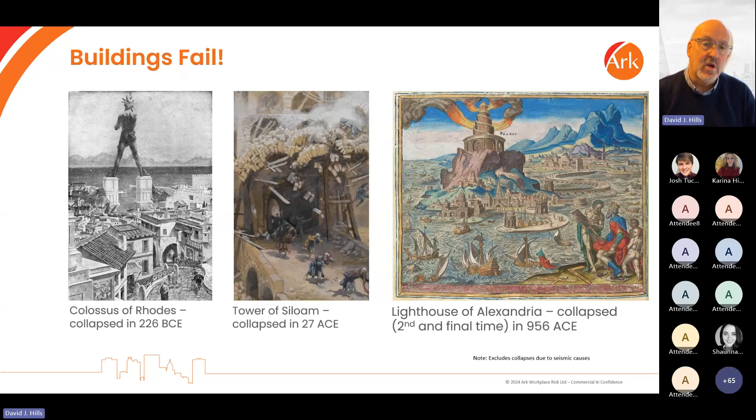So we have to recognize that buildings fail. I can go back many years to the Colossus of Rhodes back in 226 BCE, all the way to the failure of the lighthouse in Alexandria in 956. But really what we want to focus on is notable residential structural failures. So what I've done here is put together a very quick list of those types of buildings that have failed over time where a number of people have died.

So we've actually had structural failures. These particular ones exclude all types of collapses due to seismic activity—we're not talking here about failures in respect of earthquakes, for example. But we could go back to 1968 and Ronan Point in London, where we had 4 dead and 17 injured, and we can move our way all the way through to Champlain Towers in 2021, where we had over 98 dead.

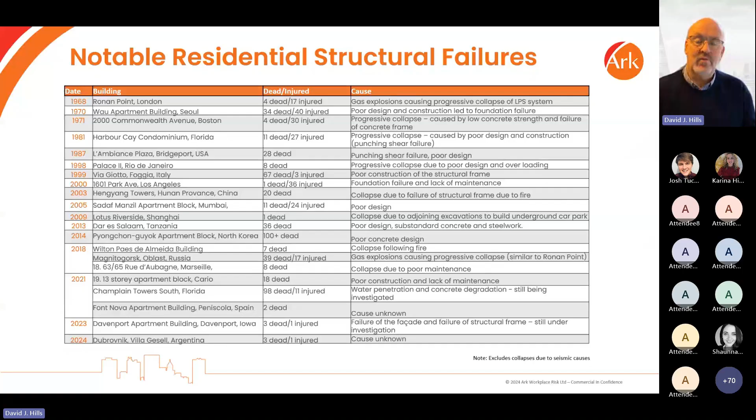And then just a few months ago in Dubrovnik, Argentina, we had another failure there. So we've had a significant number of residential failures across the globe, but I want to focus on these two to start with, and that is Ronan Point.

Ronan Point was a pivotal situation in the UK. It was constructed post-war, a large panel system, effectively large panels pinned together to form the building. We had a gas explosion on the 18th floor. It blew out one of the load-bearing walls, and that meant each of the floors above, all that were supporting the flats, stacked onto the floors below, causing a progressive collapse.

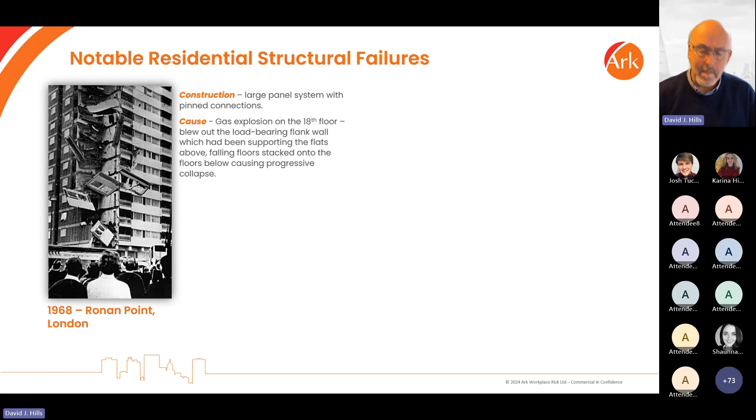Out of that, we had changes to the building regulations put in place in 1970, which lasted right through to a couple of years ago. So we've got a lot of buildings in the UK considered in respect of disproportionate or progressive collapse, however you want to call it. But also there are a number of buildings, the older ones especially, that have particular concerns we need to at least consider. Then, of course, a couple of years ago, 2021, Champlain Towers.

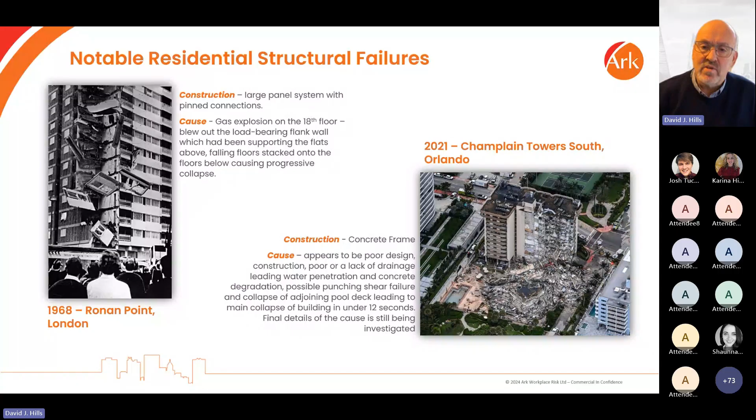I'm going to take you through Champlain Towers in more detail with some footage and an analysis of why it went wrong. We've got a concrete frame building, poor design, poor construction, a lack of drainage, and we had half of that building collapse within 12 seconds. The final cause is still being investigated, but there are some very clear and obvious issues. So one thing I'd say straight away is that this is not down to a single issue.

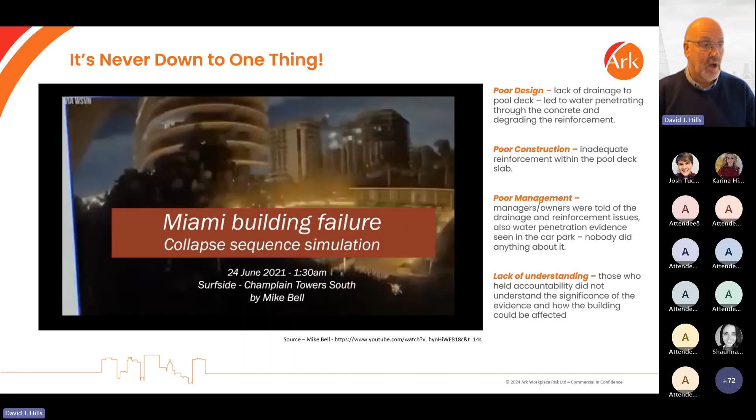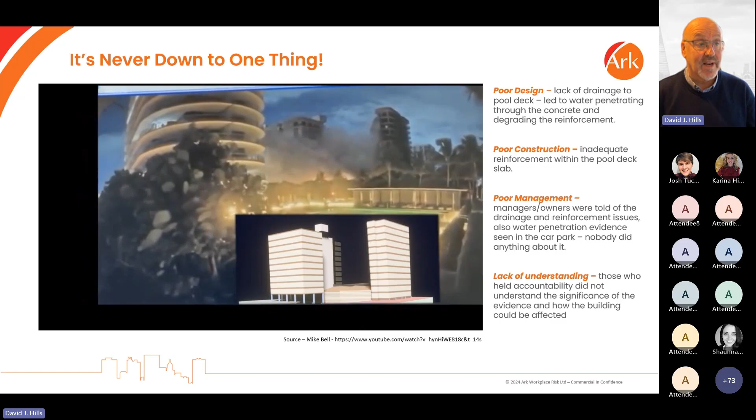The simulation I want to show you comes from a gentleman called Mike Bell. You're seeing CCTV footage from an adjoining building of the collapse, and as I say, that collapse takes 12 seconds.

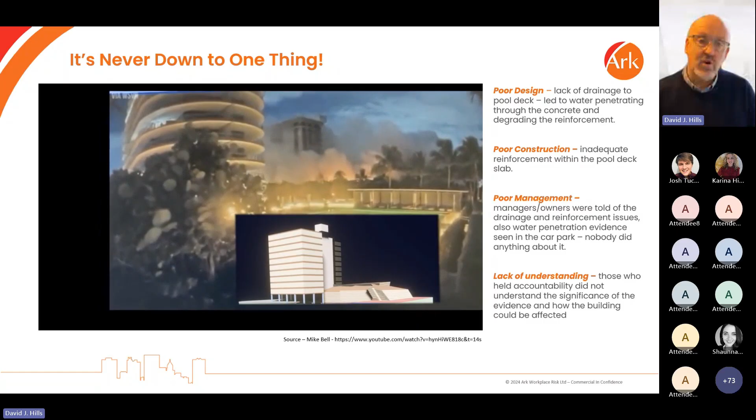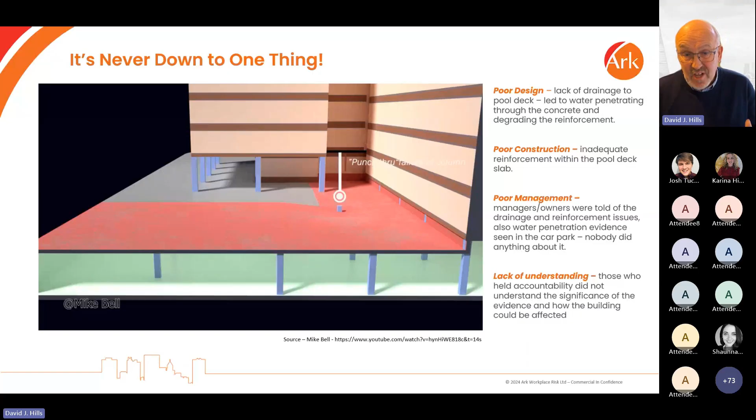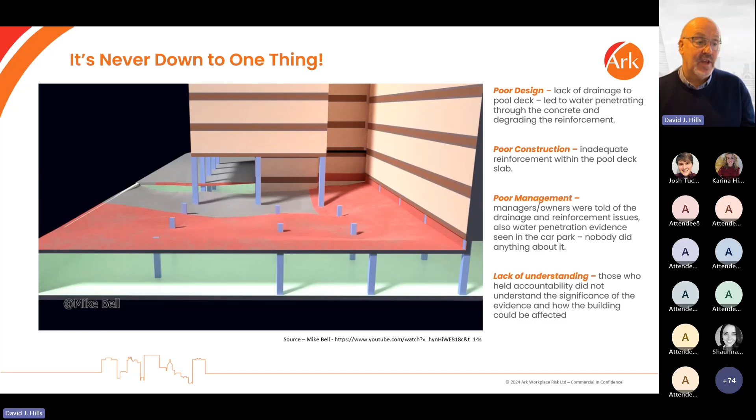What you'll see through his simulation is that we've got very poor design. We've got a pool deck adjoining the building, underneath which you have a car park, and that pool deck didn't have any particular drainage. So water went through the pool deck and started to corrode some of the reinforcement. The reinforcement was poorly placed, and we started to see what's called punch-through shearing, where the column heads were punching through during this failure.

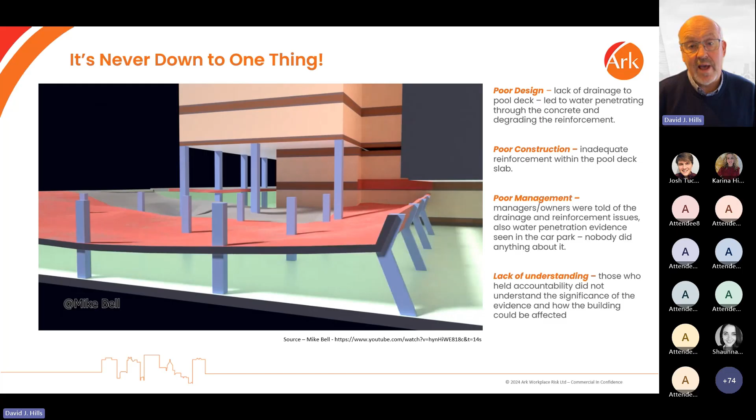We had a bit of a catenary action here where we were pulling columns out, and then we actually had the structural collapse of parts of the building.

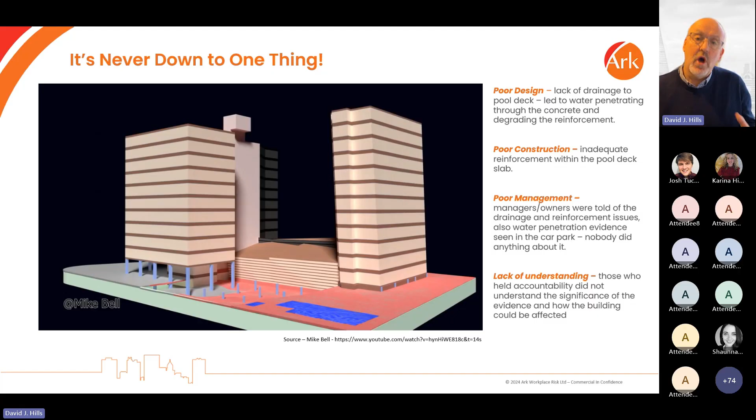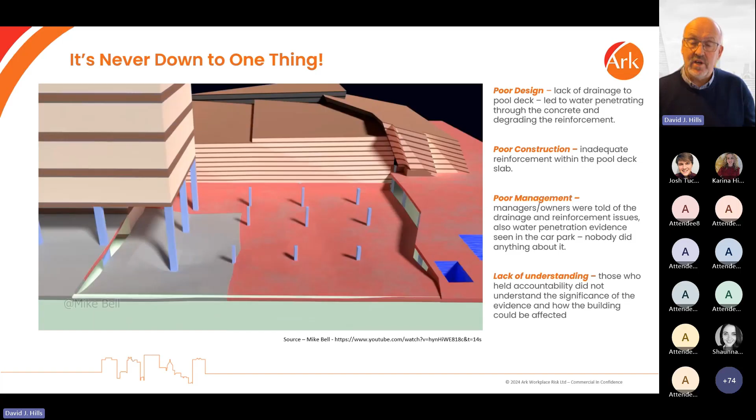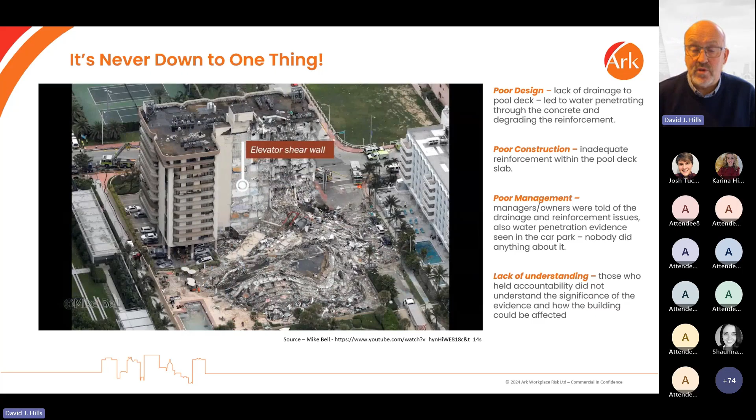Now, all of those issues were known about. The management company and the owners of that building had undertaken to review particular concerns, especially within the car park. They were told there were drainage problems. They were told about concerns over reinforcing issues and water penetration getting into the car park itself, but nobody did anything about it, mainly because they didn't actually understand how important those concerns were.

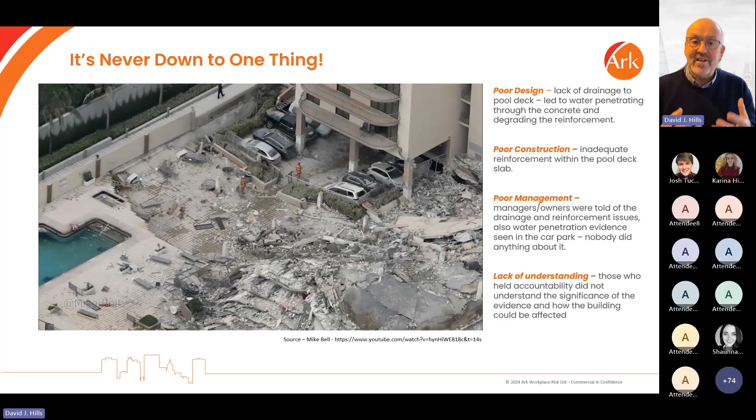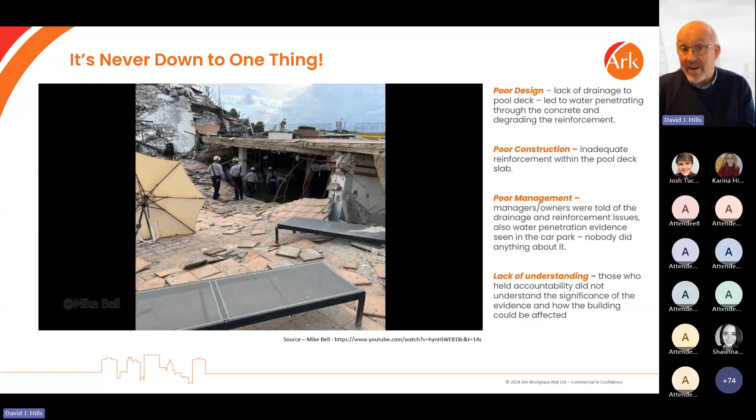So that is what I really wanted to show you quickly about how things can happen. It's not normally just down to one thing. Here we've got poor design, poor construction, poor management, and a complete lack of understanding of why and how things actually fail. So let's move on then.

So we know that buildings fail, and they often fail for numerous reasons. But the Building Safety Act now requires us to start considering the assessment of structural stability as part of building safety risks. Section 83 of the Act basically states very clearly those who have accountability for a higher-risk building or part of that building. So you may not have total control over all of that particular building. They must assess the building safety risks as regards the parts of the building for which they are responsible.

And I'm going to go back to the definition of building safety risks in a few seconds. But it's very important that section then goes on to say that further such assessments must be made at regular intervals. It does not state the type of regularity, but it does state they should be reviewed at a time the accountable person believes there is reason to suspect the current assessment is no longer valid.

And on the third basis, you must undertake such assessments at the direction of the regulator, and the regulator will then set and determine the period and frequency of that particular assessment.

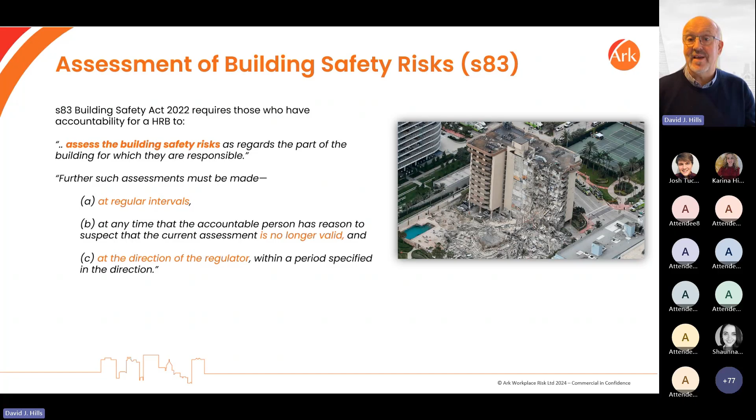We've got to undertake these types of assessments, and we can't just believe that assessment is going to be suitable and sufficient forevermore. We have to look at undertaking those types of assessments on a regular basis.

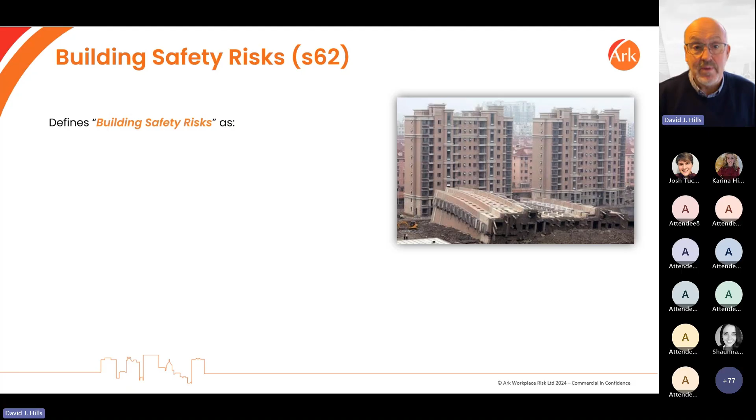Now, I want to quickly jump back to building safety risks, so we can square that particular circle. We have to assess all of those building safety risks, defined as the risk to the safety of people in or about a building arising from any of the following: the spread of fire, which most people understand and have undertaken fire risk assessments for because of other legislation.

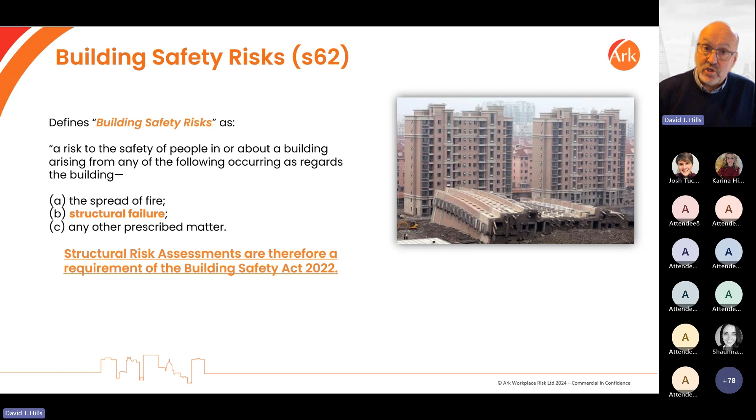The Regulatory Reform Fire Safety Order in England, Fire Safety Scotland regulations in Scotland, for example. But it also says we've got to consider structural failure and any other prescribed matter. So it's very clear then: the law requires structural risk assessments for a higher risk building as a very clear requirement of the Building Safety Act.

What I would say, though, is that the definition of building safety risks is fluid. It can change at any time. The government has given themselves the opportunity to make those changes using statutory instruments, and so they can do that on a relatively quick basis.

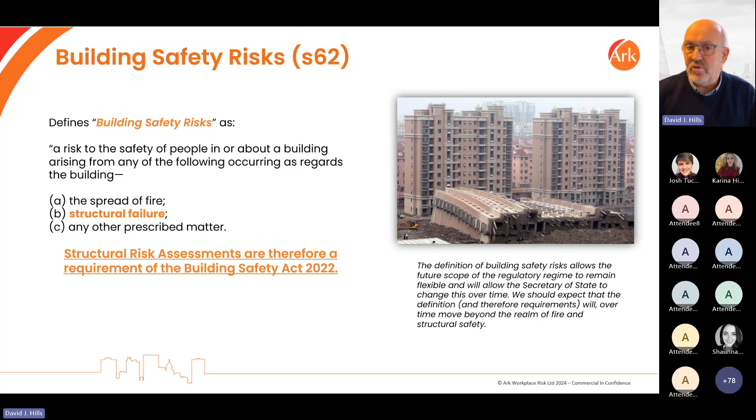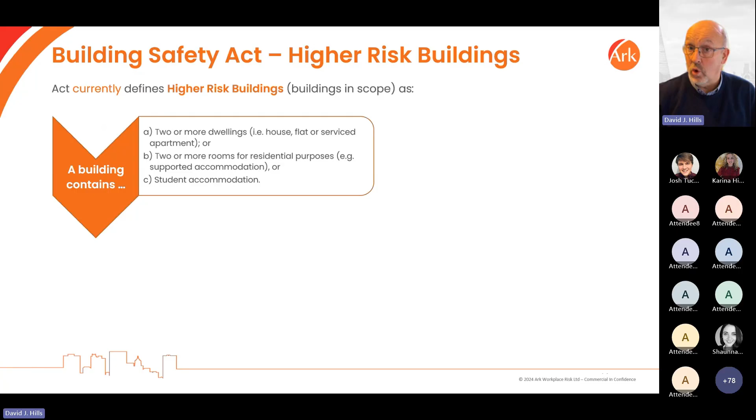One question we often get asked is, do we need to do this for all types of buildings? The only types of buildings that present a legal requirement for you to undertake a structural risk assessment are buildings that contain two or more dwellings, or two or more rooms for residential purposes, or buildings that contain student accommodation, and that satisfy the current height conditions - basically 18 meters above ground level, and/or 7 stories.

Now that could change over time. The recommendation within the Grenfell Tower inquiry report suggests that may have to change, but we are where we are at the moment. That is the requirement currently, although it's an arbitrary figure, and the inquiry is looking for us to move to a different area.

There is a possibility the scope could change again through parliamentary process, allowing the Secretary of State to make those changes on a relatively quick basis. So we understand that by April next year, we will have an understanding of where the government intends to take the next stage of building safety following the Part 2 section of the Grenfell Tower inquiry.

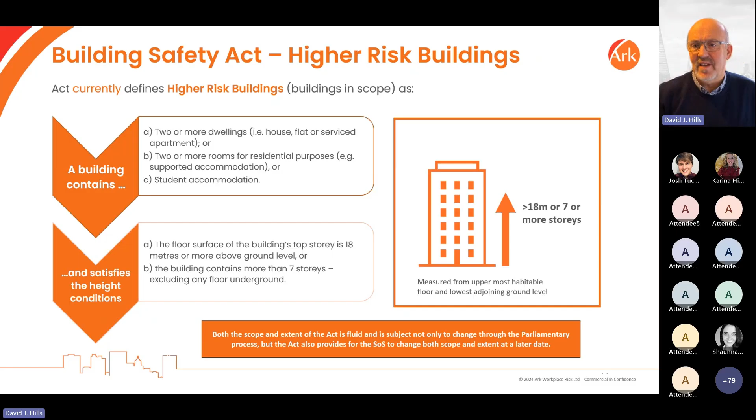So there's a need for structural risk assessments in higher-risk buildings. Those higher-risk buildings are well known. So how do we go about undertaking structural risk assessments? It's a question we get asked often.

The one thing we always refer back to is the Institution of Structural Engineers guidance. They have produced a very good guide called Assessing Higher Risk Buildings under the Building Safety Act, a compendium of structural typologies. This document is really good, but it is a guide. There is a legal requirement for the structural risk assessment, but at the moment this is the best way of undertaking that particular approach.

Now, the guide itself makes it very clear that there are certain limitations. It says, for example, due to the open-ended nature of structural assessments for building safety cases, a degree of prioritization is required, and they base much of this on risk and on the type of building. They also make it very clear that it will not be possible to assess every structural element through an assessment process, nor would it be appropriate to do so.

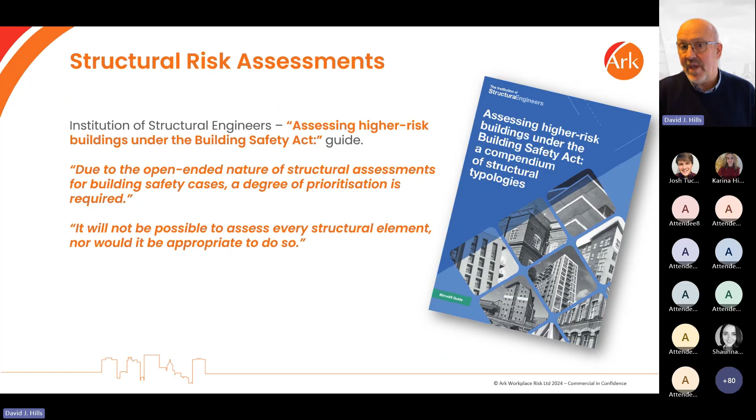And the guide also makes it very clear that the inspection recommended within their particular four-step process is not undertaken on an intrusive basis. I want to put a caveat on that later - I've got another slide in a few moments' time to talk about that particular part.

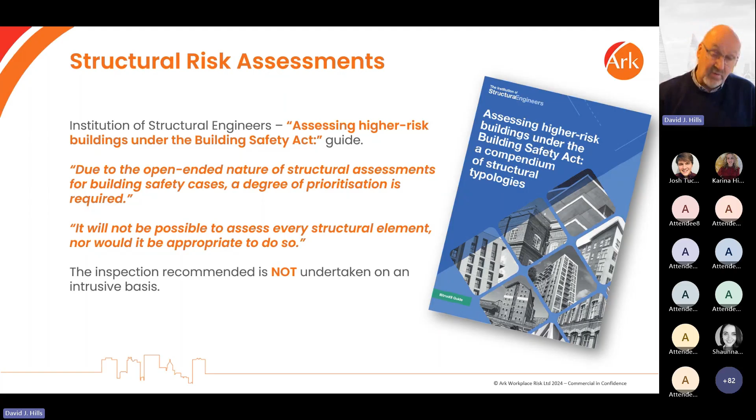But the whole sole aim of this is to undertake an assessment of the building based on four very clear steps, set out by the Institution of Structural Engineers. It talks about a desktop study and collation of information, continuing to review that information, a visual survey and inspection of the building, and then the actual assessment itself.

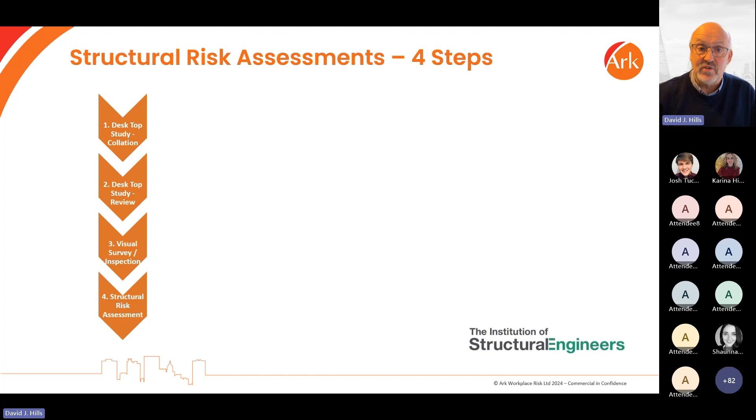So we are collating that building information, which comes from various different sources such as building archives. You might be lucky enough to get information from building control, but it's not always possible. You may understand or know what type of building you've got, so you've got industry publications, and also the website CROSS UK, which is a really good, helpful, safety-based database of concerns and issues raised by various parties for different types of building.

We've then got to identify the potential weaknesses. These are the common weaknesses that the Institution has recommended they consider, as well as very construction-specific ones. We can look through the guidance, and that will tell us what we should be looking for in certain types of building. CROSS UK is exceedingly good, as I said, and also we need to rely upon the engineer's own experience.

We then undertake that visual survey, assessing the potential building weaknesses, looking for modifications to the building, to the design. Modifications, for example, are drilling holes through concrete beams for use for services, retrofitting services. That's the type of modification we are obviously very concerned about.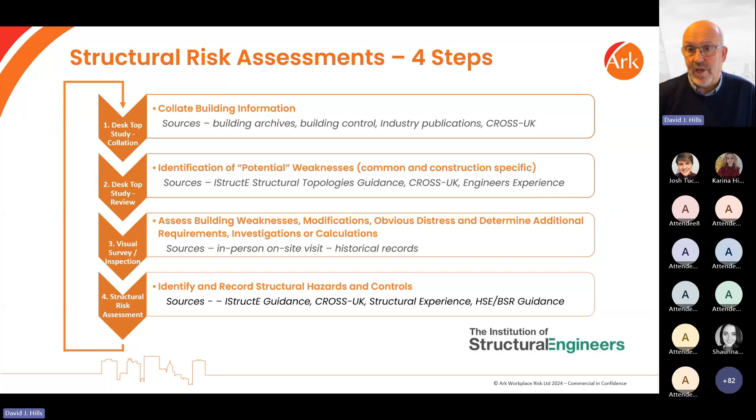Now, the Health and Safety Executive have produced some guidance, and they've been very clear. The regulator, who sits within the Health and Safety Executive, has advised that the level and extent, or the intrusive nature of any assessment, should be proportional to the risks.

And so therefore we have to start thinking about the actual building itself, the age of the building. The older the building, the more likely we've had changes to it, and the less likely we're going to have calculations. We need to start thinking about the design of that building and the construction techniques and methodologies that have been used.

Are we using, for example, large panel systems? Are we using deleterious materials like RAAC, for example, or wood wool? And then obviously we've got to start thinking of the occupancy as well.

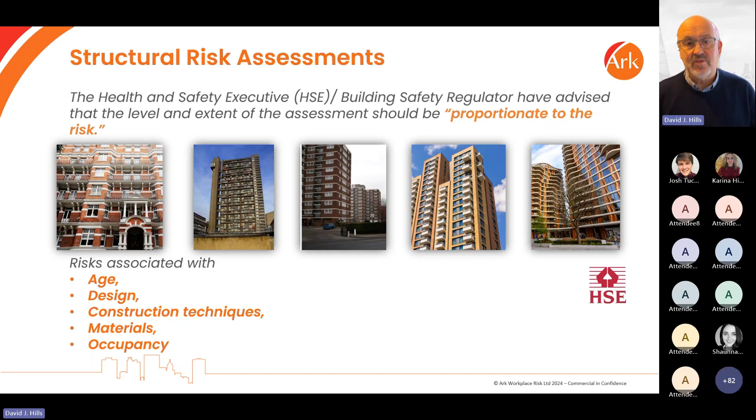It's not just going to be a case of buildings that were purpose built. We've got buildings that, for example, were office blocks that have been converted to residential blocks. So we have to start thinking about the level based upon those particular risks.

But the guidance makes it very clear that whilst we can acknowledge the Institution of Structural Engineers' approach means it's mostly going to be a visual or non-intrusive inspection, the Health and Safety Executive have made it very, very clear that there is going to be significant existing building information that is missing, and intrusive inspections may therefore be required. So we cannot rule out that additional and intrusive investigations are going to be the findings of your overall structural risk assessment.

So the guidance then, that's where we are with what structural risk assessments should be doing, and the legal requirements and the guidance sitting behind it.

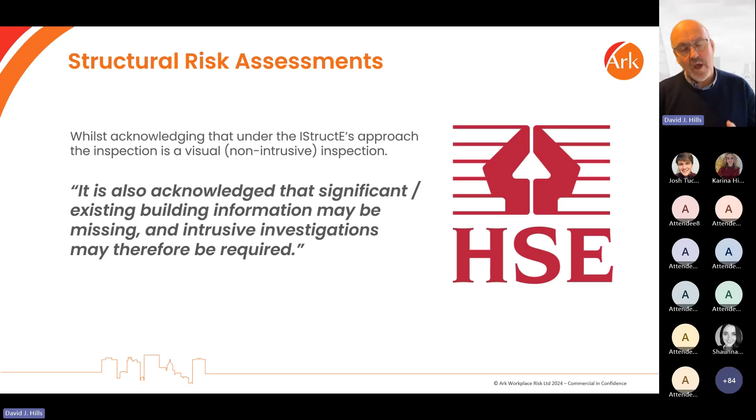But just to give you a little bit of information, when we are undertaking our structural risk assessments for our clients, we take a look firstly at the common issues, the types of issues that will be common to all types of building. I've no intentions of taking you through all of these—there are lots of them—but we have to start considering all of the elements here.

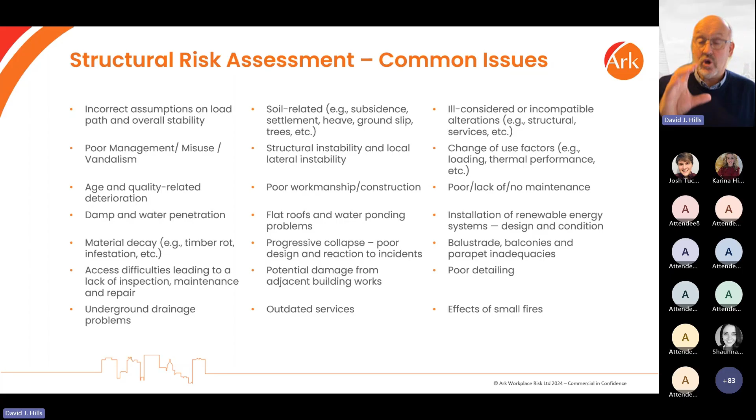One of the major issues that we're always concerned about is damp and water penetration, because of the types and nature of the construction materials that have been used. And obviously workmanship and construction defects are, again, very, very important. But once we've considered the common issues, we then start having to think about the construction-specific issues, so you're going to have, for example, load bearing masonry.

It's not a hugely used approach, especially for very tall buildings, but we're going to have to start thinking about the mortar arrangements. We're going to be talking about lintels, and we're going to be looking at roof spread and basically cracking within that particular type of structural arrangement.

You're going to then start thinking about concrete framed buildings. This is probably the most prevalent type of construction for taller framed buildings, especially in the UK. And again, we start looking at jointing problems and concrete cover issues.

And again, water and damp penetration, spalling, etc. We also have to consider other elements. If it's a steel framed building, again, effects of cladding on the actual stability of that building, corrosion of the actual members. Damp penetration is so important that we check, and therefore checking things such as roofs, gutters, and any other types of leak are very, very important in respect of your structural risk assessment.

And then we start moving into something that's growing in nature - timber framed, or what we call CLT, cross laminated timber constructions. We do have a number of cross laminated timber constructions that are higher-risk buildings in the UK. And so we have to start looking at load sharing issues, service holes and notches, and those other elements that have actually been undertaken during construction.

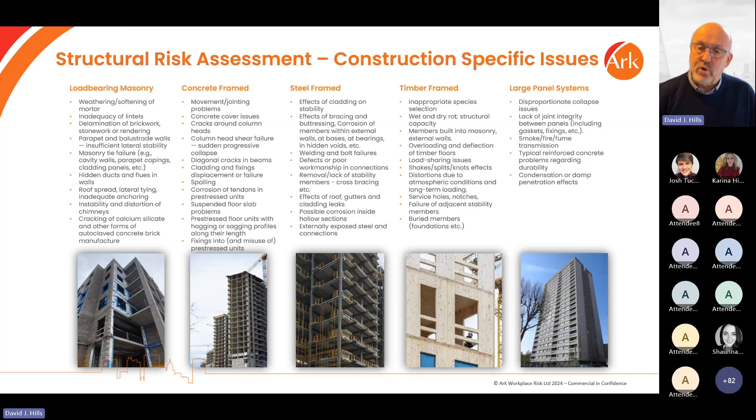One of the last things I just really wanted to talk about regarding the actual assessments themselves is the fact that we need to start thinking about the competence of those individuals undertaking it. Very clearly, the structural engineer must have sufficient skills, knowledge, experience, and the right behaviours.

But the important elements here for the Institution of Structural Engineers is that they set out some very clear competence requirements - that the structural engineer needs to be able to understand the assembly of that building, how those individual components interact with each other, and the way in which the overall stability for that particular building has been designed and is maintained.

In addition, the structural engineer needs to be able to understand how the building has been built, and then draw conclusions from its general condition, such as crack patterns and distorted forms, where these are evident. And again, you'll notice this isn't talking about an intrusive survey - this is a visual survey that may later on suggest the need for other types of survey.

And then finally, it suggests that structural engineers need to be able to understand that similar signs of damage may actually have different causes. So we certainly look, in our team, for those who have experience of looking at buildings forensically, and looking at how we can reverse engineer and understand particular concerns. So that's the type of competence that we need to be looking at.

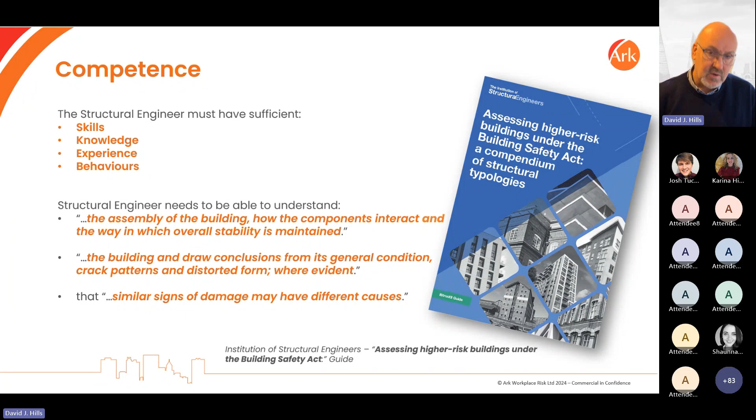Okay, so that's assessments. Now, Shauna was mentioning that one of the biggest questions that we tend to get is about the difference between a structural risk assessment and a condition survey. So I just really want to very quickly touch on a couple of slides about that and consider the differences between the two. On the left of this particular diagram here, we've got structural risk assessments.

Now, they are, as we can see, a legal requirement. We've got the Building Safety Act 2022 and the Higher-Risk Buildings Management of Safety Risks, etc., England regulations of 2023. From that, we've got some guidance issued by the Institution of Structural Engineers, which effectively says that the actual risk assessment is a systematic process for identifying, analysing and mitigating potential risks to the structure's integrity.

Now, opposed to that, we've got the use of condition surveys. Now, these are not a legal requirement. These will generally be part of your PPM system.

We have some guidance from the British Standards Institution, BS 8210 2020, with previous versions going back to 2012, which is all about Facilities Management Code of Practice. It talks about the condition survey being the act of measuring and recording data from operating parameters to verify the condition and trends relating to that building. They recommend, for example, that a condition survey is undertaken every 3 years.

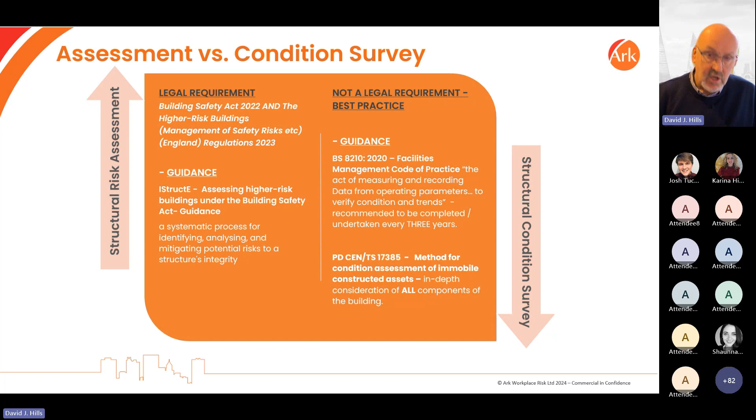So risk assessment is a legal requirement, but it's subjective in nature. It does not assess every structural component. We look at the risks and deal with this on a non-intrusive basis. They may recommend further intrusive investigations at a later date, but it's all based on a risk-based approach.

Whereas the British Standard 8210 suggests that we need to consider every structural component. It looks not only at each component, but the elements that make up that component themselves. And we then start to have to provide a scoring mechanism against its condition, the severity and the extent of any particular issue to determine what's called a condition class.

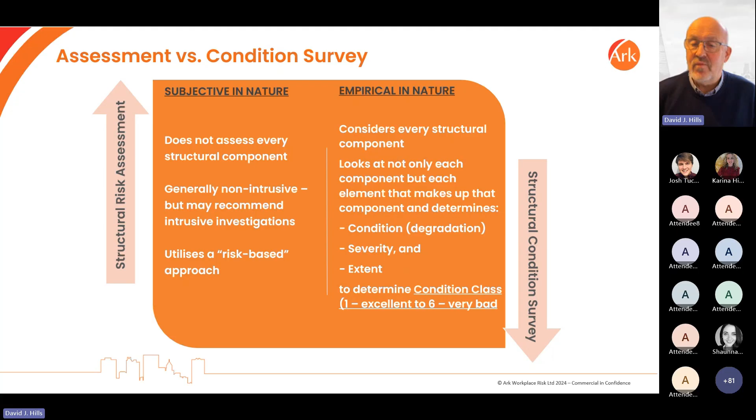If you get a condition class 1, great, it's excellent. If we get a condition class 6, then it's very bad. So worthwhile, I would suggest, looking at this particular part, getting a condition survey undertaken. It does support your building safety case report. This particular code of practice really will then take you into the individual elements and support the whole process.

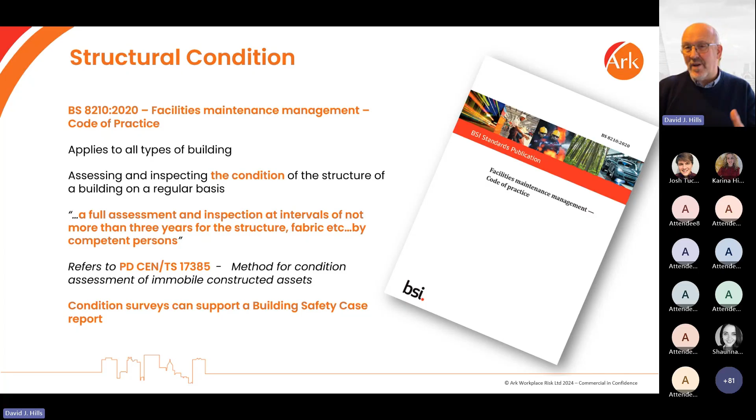Just to get your guidance a little bit more and to make this interactive, have you undertaken a condition survey for any of your buildings? Simple answer, yes or no, please. And we can start to see the results.

Similar results, I think, David, from the structural. Yeah, and I can see it moving, and I can see the fact that we're coming up to a greater degree of condition surveys that have been undertaken, which is great news. But we've got to see also the fact that condition surveys are not risk assessments. Condition surveys are great, they help us especially when writing a safety case report to outline to the regulator the condition, but it doesn't deal with the risk side of things. So almost 50-50, 55% have suggested that they haven't undertaken one, but 45% have. So as you suggested to me, Shauna, earlier, we're probably going to see a greater number of persons who have actually undertaken condition surveys. So that's as expected.

Brilliant, so let's move on then. Just really want to finish this off today and start thinking about how we therefore manage risks. I think it's very clear that whatever we do, you cannot just assess a building. You have to manage the issues that are raised.

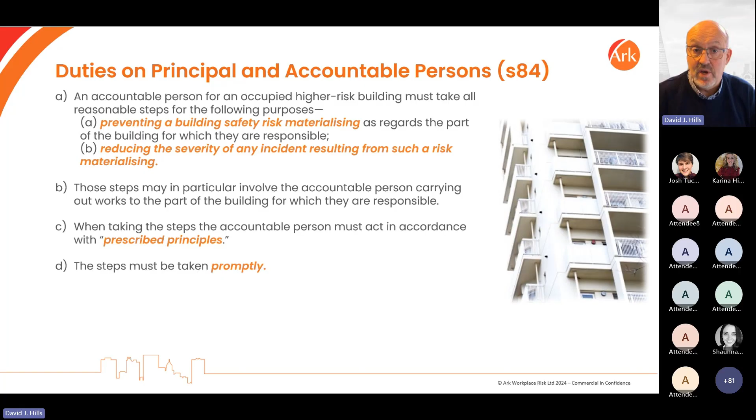It then talks about management and prescribed principles, and I want to quickly go through the prescribed principles in a few moments, because again, it isn't just a case of dealing with individual risks in isolation. We've got to start changing our approach to looking at a whole host of layers of protection. The law requires that you must take those steps promptly. We can't just undertake an assessment, put it on a shelf and leave it till 3 or 4 years later, especially if it's got issues that need to be actioned.

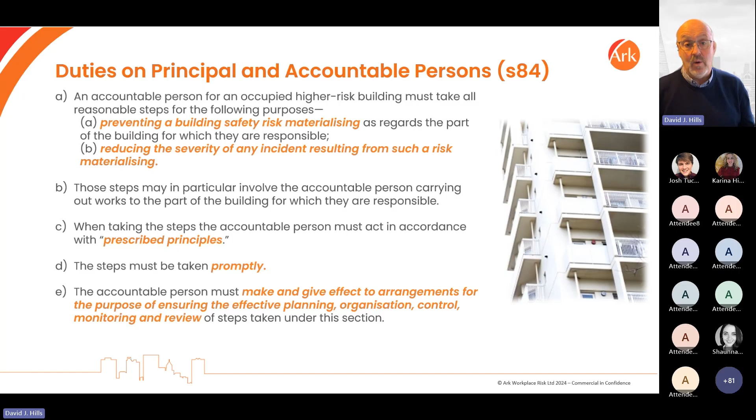So we need to take those steps promptly. And finally, the actual law says very clearly that the accountable person must effectively develop a safety management system. The regulator has produced guidance very specifically on this, which I want to touch on in a few slides' time. Those prescribed principles detail how you, as a principal or accountable person, or those supporting them—consultants, contractors, property managers—need to think about dealing with those required steps.

Now, the prescribed principles are set out within the Higher Risk Buildings Management of Safety Risk regulations that came out at the end of last year. They set out, in order of effectiveness, 10 prescribed principles that we need to consider when managing structural risks.

The first thing we've got to do is avoid those risks wherever possible. Now, more often than not, you've got an existing building, so you're not going to be able to avoid those risks. So we need to evaluate those risks, and where they cannot be avoided, identify proportionate measures to address, reduce, mitigate, or control those structural risks that have been identified.

We need to combat risks at source by introducing those proportional measures to reduce, address, mitigate, and control any of those structural risks at the earliest opportunity. So prompt action is so important there.

We need to ensure suitable and proportionate systems are in place for effective inspection, testing, and maintenance of all of the measures that we've got in place. So we need that assessment to understand what type of measures have been put in place already.

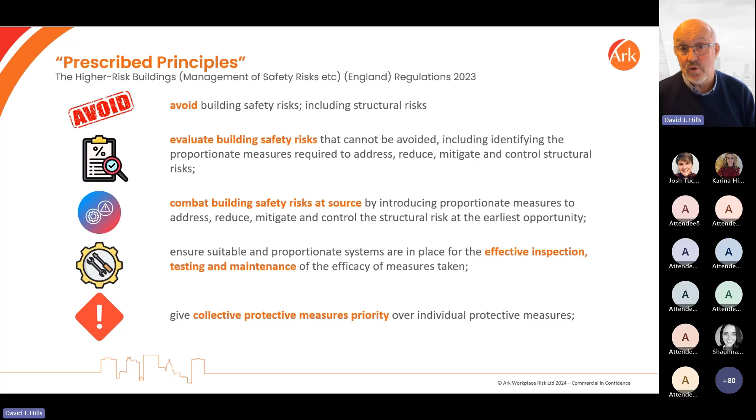As I said, we've got to start thinking about buildings as systems. We can't start looking at buildings on a silo basis. We have to accept that different parts of a control system will provide collective measures, and so the principles require that we give collective protective measures priority over individual protective measures—again, trying to move away from this silo approach.

The last five prescribed principles mean that we've got to adapt to technical progress—not only in respect of construction, but also the way we deal with things and what we're actually putting into buildings. So we need to address and understand that.

We need to make sure that if we have identified something that is dangerous, we now have a duty to replace the dangerous with the non-dangerous, as they call it, or the less dangerous. That's a control measure we now need to start considering.

We need to consider the impact on residents and carry out engagement with those residents. Most people are actually undertaking resident engagement strategies now, so that's an important part—making sure that the risks are understood by the residents themselves as well.

We need to make sure that we are giving appropriate instructions and information to our own employees and other persons working on or in the building. And we need to ensure that any person responsible for assisting with compliance with a duty under Part 4 of the 2022 Act—which deals with all of the actions required for an existing in-use building—has the relevant competence.

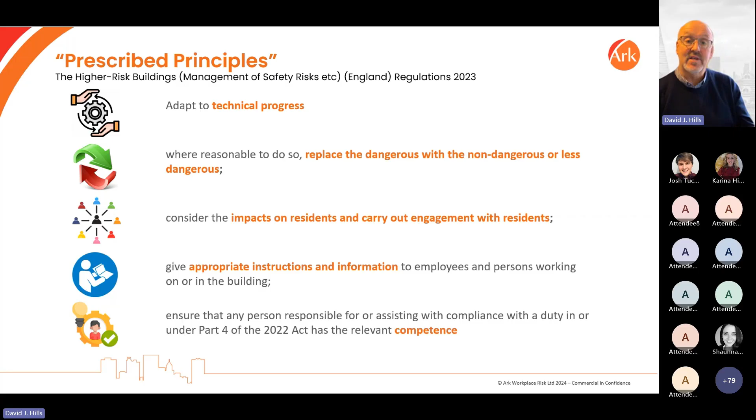So those are the prescribed principles, and the best way to look at that is, as I said, they should not be dealt with as an individual process or element. They cannot be dealt with in isolation—they provide layers of protection. So I felt the best way to describe that is to look at those various layers of protection for one particular hazard. I'm going to choose disproportionate collapse.

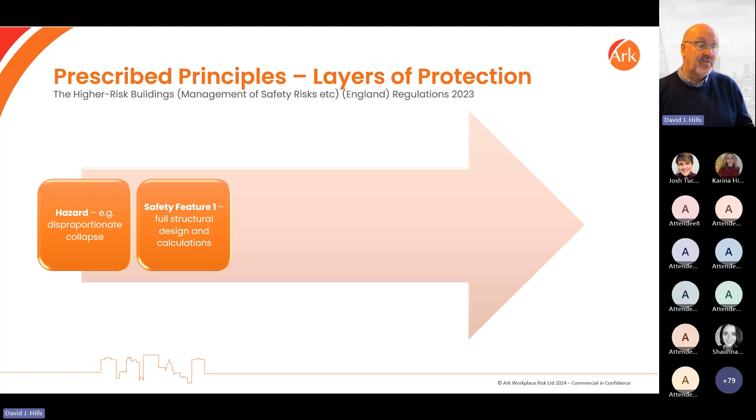Now, the first protective measure is the fact that we've got full structural calculations and a design that has taken that into account, and that design was undertaken by a competent person. So we've got that competence there. We've also ensured that we've got good and effective horizontal and vertical ties within the building.

In addition to that, we've got a PPM program that's covering the structure and the condition of that particular asset, that particular building, and that the people undertaking that planned preventative maintenance program are competent to do so, and that management are competent and understand what's actually required. So as you can see, various layers of protection.

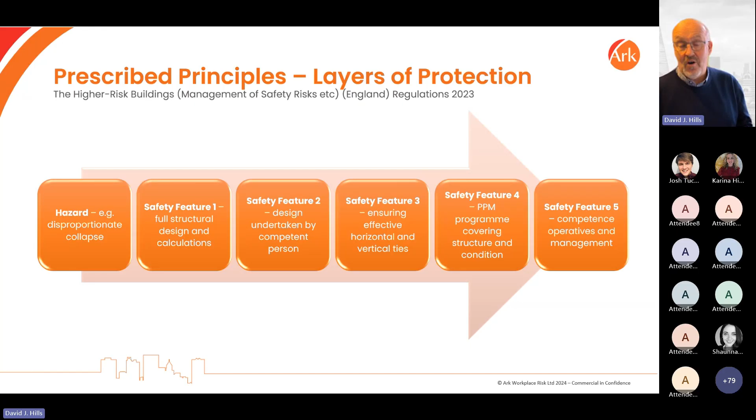Your PPM program, for example, does rely heavily on understanding the building, making sure that you've got the right competence of people involved. So it cannot be dealt with in isolation. We must not deal with it in isolation. We have these layers of protection.

And so therefore, when we are looking at structural assessments and structural risk management, we start to have to think about a holistic approach, making sure that we understand the whole of the building.

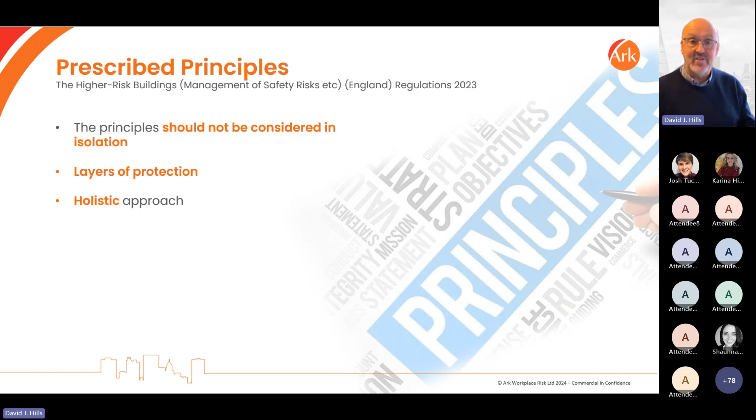We can't just think, okay, well, I've got a commercial tenancy on the ground floor, but I'm not going to include that in my structural risk assessment because I'm only responsible for the rest of the building. But we need to understand what that particular commercial tenancy has, or what effect it has or could have on your particular part of the building.

If it's, for example, a hardware store that contains butane and propane bottled gas, if those were to explode and we were to have a gas explosion, we need to think about how and what the impact on the remainder of the building is going to be.

So we need to think about those numerous protective barriers. What's in place? And we're not talking here about force fields - it's not going to happen, it's not going to work. So we therefore have to understand that we've got to consider the whole building as a system.

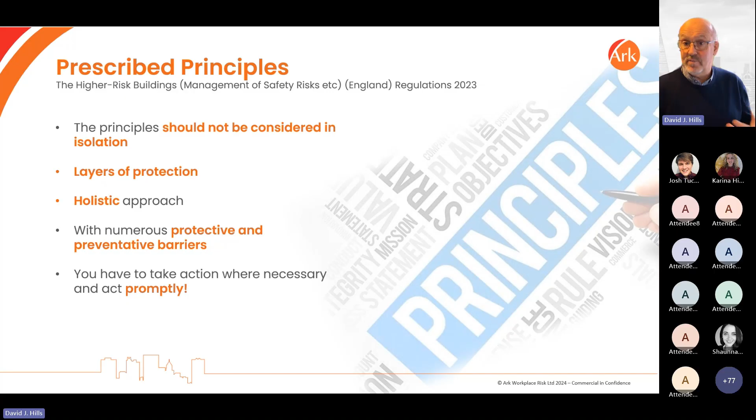And finally, when we have issues that are found, we've got to take the appropriate action where necessary and do it promptly. Okay, so that's the requirements for us in respect of how we go about managing. Let's quickly talk about safety management systems, and then we can answer any questions you may have in respect of structural risk assessments.

So safety management systems and structural risks is a really important part here. It isn't just about making sure that we've undertaken our assessment and we're carrying out those actions. Though those control measures identified within your structural risk assessment will require you to undertake certain actions at a later date - inspections of your building, for example.

But let's just quickly go back to what the law requires. The law basically states that you have got to give effect to arrangements for the purpose of ensuring the effective planning, organisation, control, monitoring and review of the steps to be taken. As the Health and Safety Executive have made it very clear, this is about developing your safety management system.

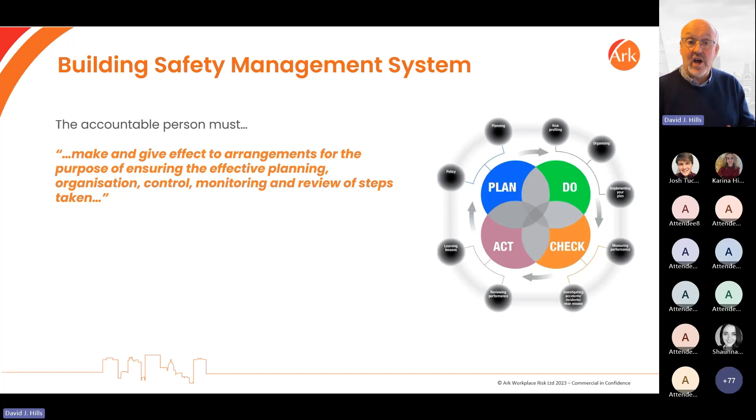And your safety management system, therefore, is going to consist of certain parts, if you follow the recommended approach, which is based around plan, do, check, act, and it's all set out within the guidance on safety management systems from the regulator.

Effectively, we need to set out that statement of intent - you need that policy statement. So what is it that you're going to do, and why are you doing this? You need to make sure that we understand who is responsible for doing what within your particular building. Clear roles, clear responsibilities. We then need a series of procedures, policies, arrangements, whatever you want to call them.

They could be flow charts, they could be written, detailed instructions, but it's all about how you manage. So we need those for your management activities, as well as undertaking fire risk assessments, but obviously we've now got to include structural risk assessments and the ongoing management of the outcomes of that risk assessment. And in addition, you're going to have other policies and procedures for building management, building and equipment maintenance and inspections, and also undertaking things on a proactive and reactive basis.

Your management system needs to be able to deal with what's called mandatory occurrences - so that's the management of fire and structural safety occurrences. Now, they are not the same as RIDDOR. Whilst we can treat them similarly, they are not the same. And there are different reporting mechanisms and different management requirements in respect of mandatory occurrences.

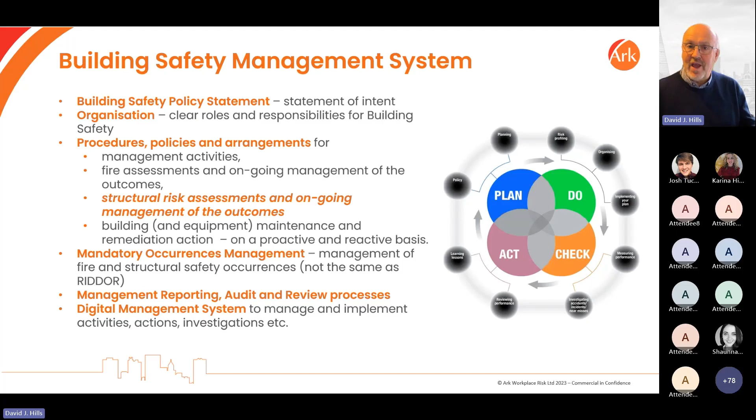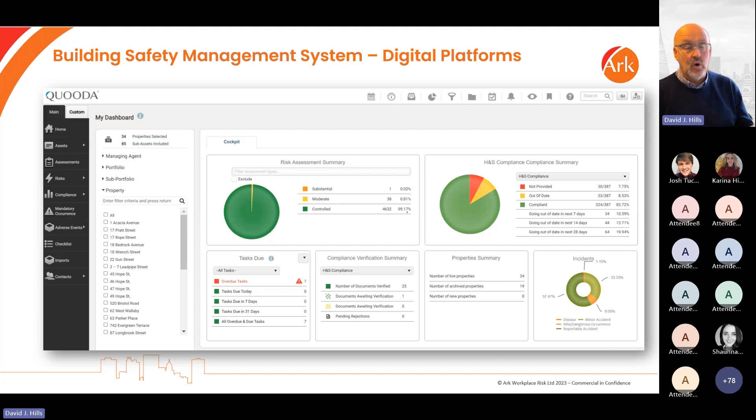I can only show you one digital management system because I only have access to our own version. We produce a system called QUOODA. So this allows you to produce dashboards so you can determine your compliance levels. You can start to consider your risk assessments and manage those individual risks depending upon the nature of them, and ensure that you understand exactly where you are.

But then we've got to start thinking about storing all of this information and making sure that we undertake this on a regular frequency. So again, using grids and for particular elements, and actually just allowing us to store documentation and ensure that you've got all of that information in one place. A single source of truth is a really important part to effective building safety management systems.

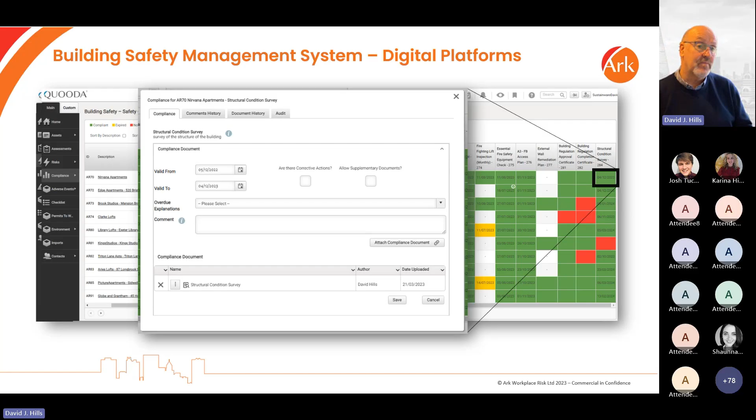Will you now be considering undertaking a structural risk assessment for your buildings as part of your requirements under the Building Safety Act?

Yeah, as we would expect, clearly there's a legal requirement to undertake it, and therefore we're looking at a significant number of people. And again, I would imagine people have already undertaken, some have already undertaken structural risk assessments. We've undertaken structural risk assessments on behalf of a number of clients. So that's not to be the figures we're seeing there are to be expected.

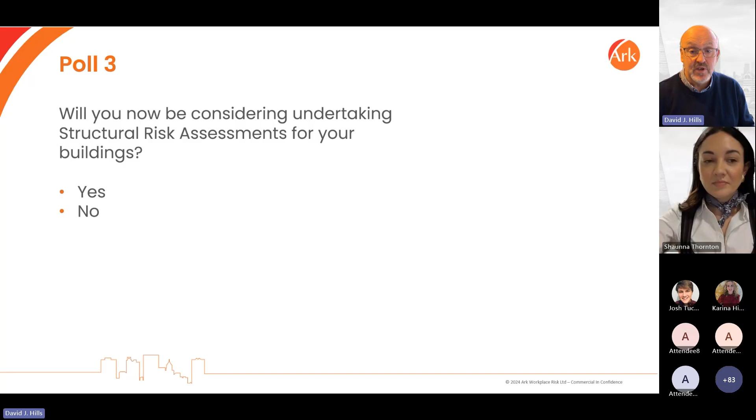Definitely. Okay, just really want to just conclude, if I can, before we take any questions. So the key takeaways from today, I think we've got to accept that buildings fail. Buildings deteriorate over time, and it's never normally down to one thing. So we therefore need to be very holistic in the way that we approach this.

And structural stability relies upon a variety of different layers of protection. And so therefore we need to, when we're undertaking our assessments, make sure that we're considering those different layers of protection. And then when the building comes out of that assessment, and we may have a number of steps that need to be taken, be it finding calculations, be it undertaking intrusive surveys, or actually mending parts of the building, then we need to actually understand where that fits in as a collective rather than on an individual basis.

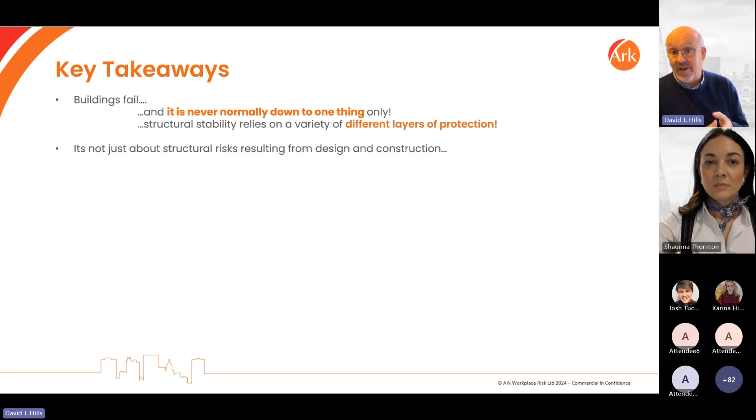And I think it's really important that we understand that we're not just talking about structural risks resulting from design and construction failures. What we have seen in our experience, it's also about property management action that's been taken and sometimes inaction as well. So it's really important that we get to grips with that particular part as well. It's across the design, the construction, and the way that we manage on an ongoing basis that particular building.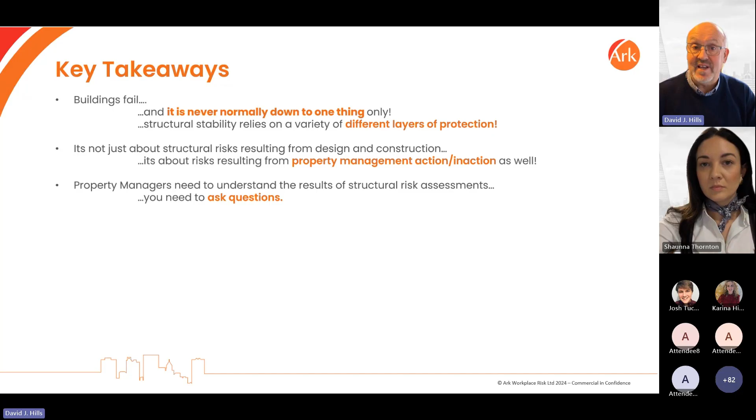So property managers really do need to understand the results of a structural risk assessment. And now I'm not going to suggest that property managers are not competent to do this, but the one thing I would say is that property managers must ask questions. They must make sure they fully understand what the impact of a particular step that's being recommended or a particular action that's actually required. You really do need to understand it. That was one of the major issues at Champlain Towers.

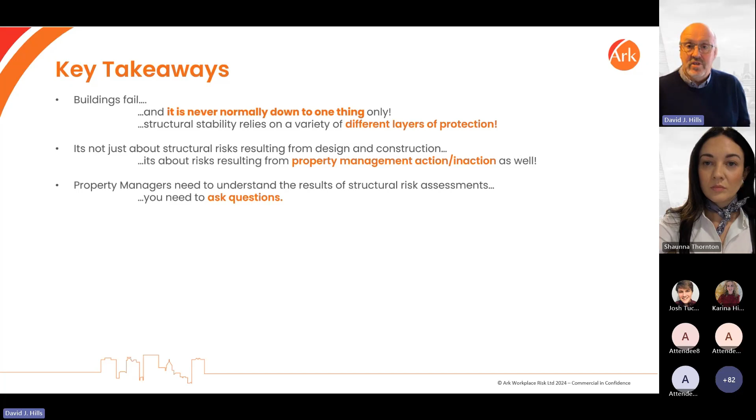We'd had 3 sets of reports telling us particular concerns, but nobody asked the actual structural engineer to turn around and say, well, what does it actually mean? What could happen? Just because someone says it could corrode the reinforcement doesn't always compute to everybody. So we do need to ask those questions.

As I said, structural risk assessments are a legal requirement, especially for high-risk buildings under the Building Safety Act. We are seeing some organisations decide that they're going to do it for smaller and smaller sized buildings, but there is no legal requirement for that.

Just finally, in respect of our experience, the building safety regulator is asking questions. They are seeking clarifications regarding structural risk assessments from owners, especially when assessing a building safety case report. They focus very heavily on the structural side, mainly because some of the safety case reports submitted to the regulator don't tend to focus sufficiently on structural safety.

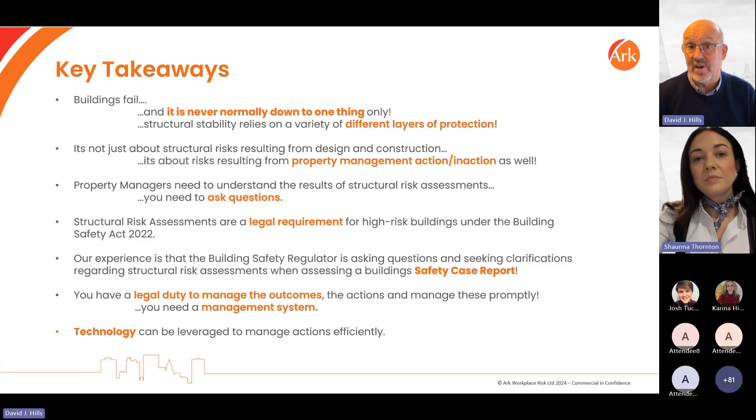You have a legal duty to manage the outcomes. We've dealt with that, so you do need a management system. And as I said right at the very end there, technology can be leveraged to help you manage those risks efficiently and effectively.